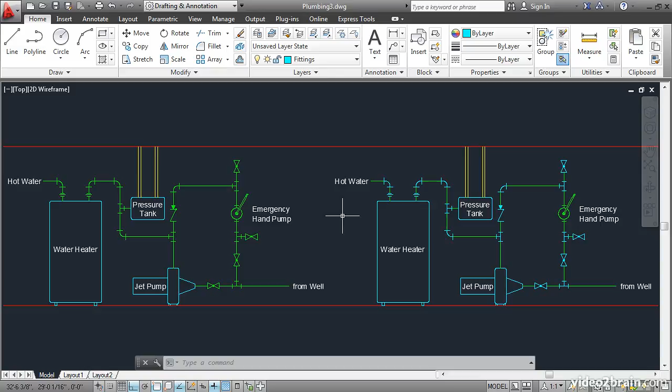In this video, you will insert, explode, alter geometry, and redefine a block definition. Then you will learn how to edit blocks in place so that you can save time performing these same steps. Open the Plumbing 3 project file.

I'd like to change this emergency hand pump block so that it appears cyan like all the other plumbing fittings. Select the block reference and look at the Properties panel. It says the color is set by layer, and the layer that it's on is cyan. So, what's wrong? You might assume that it should appear in cyan.

What's actually happening is the objects inside the block definition were on the plumbing layer, which is green. So they're not inheriting the properties of the layer that the block reference is on. To solve this problem, what we need to do is insert another copy of the hand pump off to the side someplace, explode it, change the objects to layer 0, and then redefine the block.

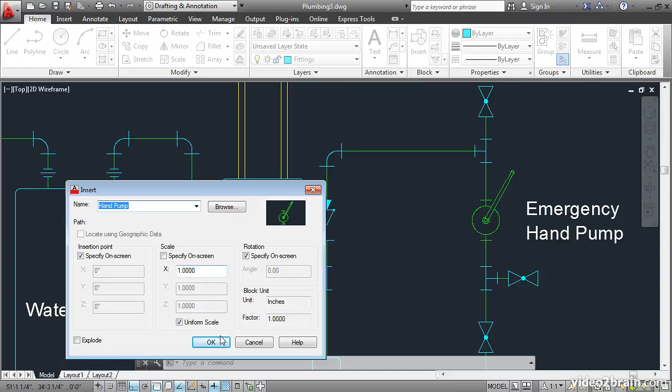I'll press Escape, and then insert the hand pump. OK. I'll click a point over here someplace, and click again to insert the rotation angle. Then I'll explode this block, turning it into its constituent pieces. Then select all the pieces and change their layer assignment to 0. Layer 0 is the only layer that lets geometry inherit the properties that the block reference goes on to.

Next, create a new block definition up here. And if you want to redefine an existing block, you have to use exactly the same name. So let's select that here from the list. Hand pump. I need to specify the base point, and this should be in the same place as it was before. It's right here at the base. We also need to reselect the objects.

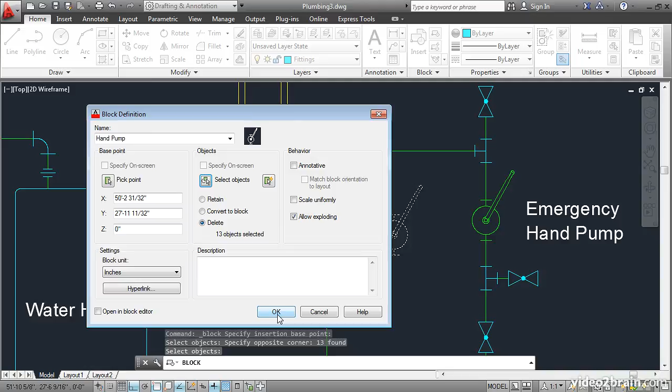And then click OK. It says hand pump is already defined as a block in this drawing. Would you like to redefine this block reference? Yes, we do. Click Redefine Block. There we go, mission accomplished. Now there's actually a quicker way to do this sort of thing. It's called editing a block in place.

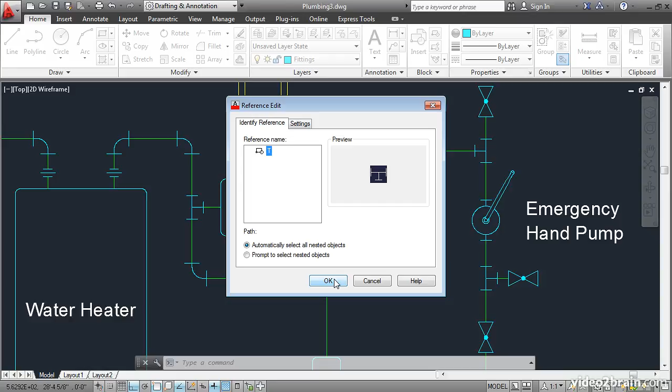For example, let's say we want to change the way that this T looks. I don't like the way that these lines stick out so far from the piping. What if I brought that in and made those lines a little smaller? I'll select this existing block reference, right-click, and choose Edit Block in Place from the context menu. Then click OK here in the Reference Edit dialog box to indicate that you want to edit this T block.

Notice that everything else gets dimmer so that you can focus on working on this geometry within the block definition. I'll zoom in and then use the Scale command. Scale this line down from this endpoint. I'll type a scale factor of 0.5, enter, so it gets to be half as big as it was originally. And then I'll do the same here on this line, 0.5, and once more on this line, 0.5.

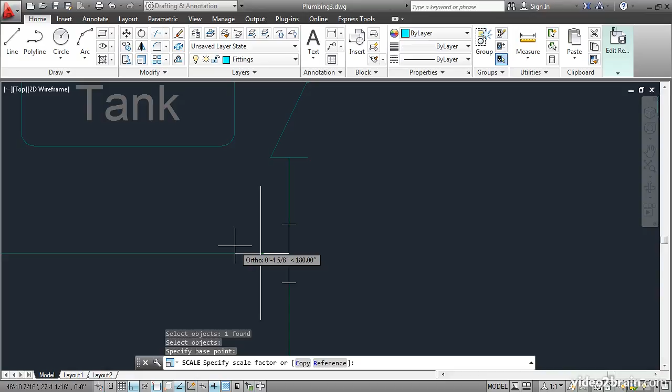Now I'm done. I have to come over here and choose Save Changes. Click OK. And all the T blocks have been automatically updated with the change. You learned both how to redefine a block by name and how to edit a block in place. Now you know 2 methods for altering blocks so that you can control many block references from a few block definitions.